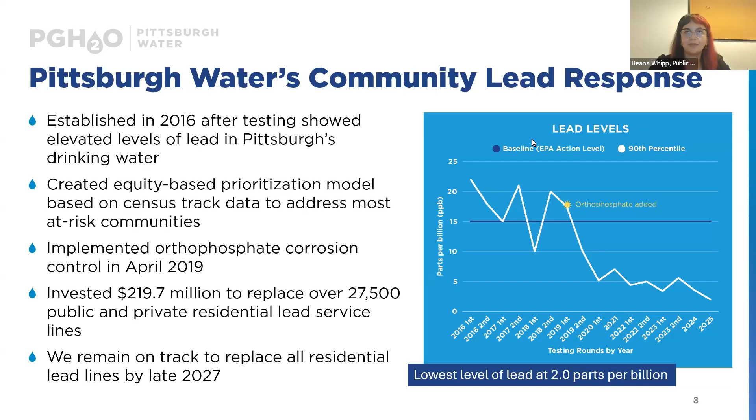So the big question, probably the reason why you're here, is what exactly are we doing? The work taking place in Bloomfield and central Lawrenceville falls under one of our neighborhood lead service line removal projects. For neighborhood LSLR, we'll replace all residential lead service lines to protect our community from the harmful impacts of lead, which includes both the public side and the private side. This is at no direct cost to our customers.

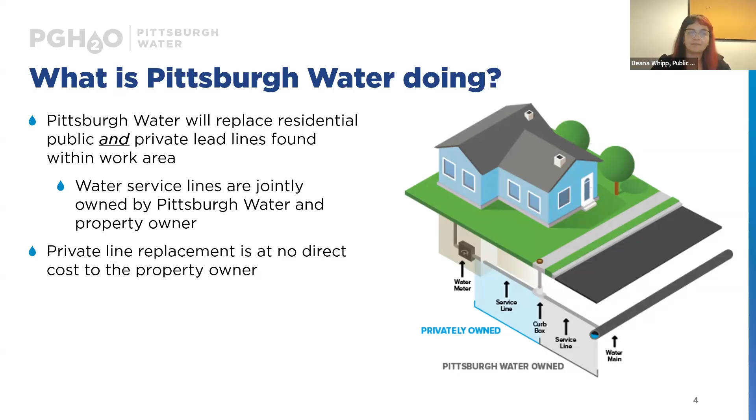The next question folks usually have is how do we select these addresses. When planning our work areas, we follow the PA Department of Environmental Protection's inventory guidance to determine whether a home has a lead service line or if we don't know the material. Building our inventory includes looking at historic installation records, physical inspections of service lines through excavation and examining the pipe material, and even customer reported data if someone had proactively removed their service line and gotten it replaced. So if our records indicate that your pipes are either lead, galvanized iron, or unknown, you are eligible for a replacement. But not every home on the street will require one. Service lines vary from property to property, so neighbors may receive different notifications based on available records for each property's service line material.

For attendees who may not have received an agreement packet, I highly recommend checking out our Lead Service Line map. It's an interactive GIS map hosted on our website. You can go to pgh2o.com/leadmap and plug your address into the search bar. It'll bring you right there and show if we've completed replacements in your area, if it's planned future work, or if we're currently working there. It'll also identify what we have on record as to whether your public and private line, and what material that may be made of.

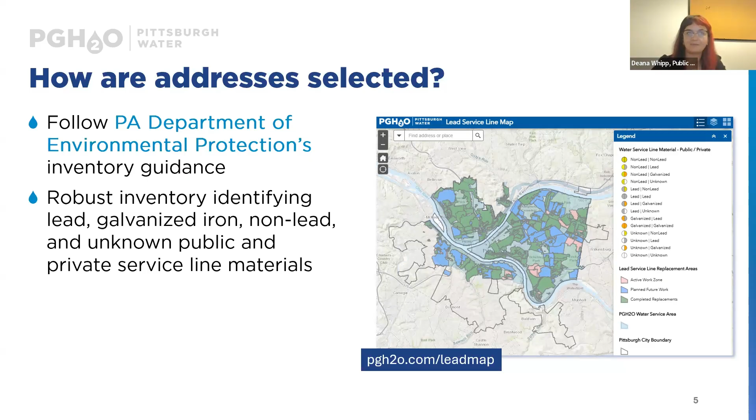So diving into the nitty-gritty, we're going to discuss what residents can expect, from receiving that agreement packet in the mail to having streets milled and paved during restoration.

The first thing you probably received was this wonderful packet in the mail. It does include a wealth of information, but our Lead Help Desk sends out this packet about 45 days in advance to notify addresses identified in the upcoming work area. This is sent to both the property owner, if you live at that address, or the landlord and the tenant. So it's a hefty packet, but it holds a lot of information about what is going to be upcoming in your neighborhood, including a letter from our CEO introducing the program and describing the work that Pittsburgh Water will be completing, and an access agreement form, which is very important.

We'll dive into that next. That must be signed and returned by the property owner. Lastly, some informational materials like a fact sheet outlining the property owner's responsibilities, Pittsburgh Water's responsibilities during construction, infographics identifying service line ownership, a general lead FAQ, and termination risks and what comes with not returning the agreement form, as well as additional resources for tenants.

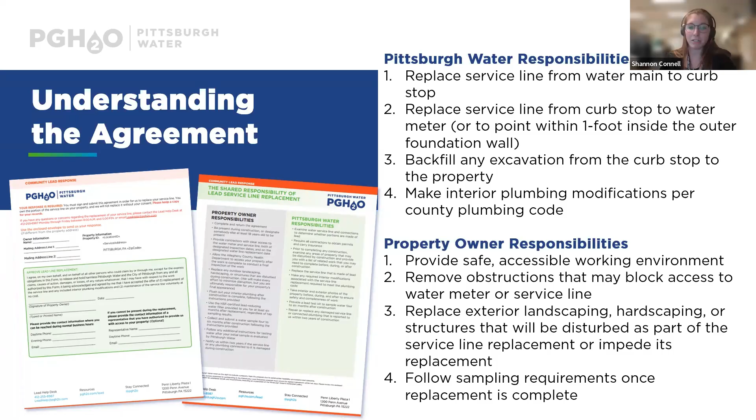This sampling kit typically comes out about three to six months following the replacement of the lead service line. We ask that sampling procedures are followed, as there are a lot of instructions in that kit. Following the replacement, we do ask that you complete sampling to ensure that the lead levels are back to a safe level.

Pittsburgh Water is regulated by the Pennsylvania Public Utility Commission, or the PUC. In 2021, the PUC put out a mandate that we're not able to complete a partial replacement. A partial replacement would occur if we were to do any work on the public side of the service line, such as a repair or replacement.

If there was lead on the private service line, we could not connect back to that private lead line. That would be considered a partial service line replacement, and we're not allowed to do this as ordered by the PUC.

So they mandated that in order for us to avoid a partial service line replacement, we would have to terminate water service on the private side if we do not have agreement by the property owner to complete the work on the public side of the service line, if there is lead present.

Through a series of notifications, which we'll get into on the next slide, we are required to follow this termination procedure in the scenario where a property owner declines or is unresponsive to our outreach attempts and does not sign the agreement. We can't just go up and shut off the water service whenever we feel like it; we have to follow this termination procedure, which includes a series of different communications, such as written communications we send in the mail and postings that we hang at the address.

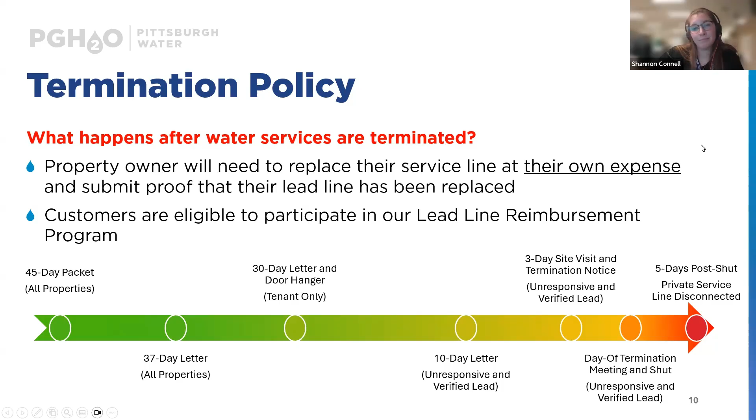So, project initiation - I've mentioned a couple times the coordination agreement or the coordination appointment. Once you've signed that agreement, the next time you'll hear from us is when we call you to schedule the coordination appointment.

So that's one of the reasons we're having this coordination appointment. We've had situations where we've dug up the sidewalk, found copper on both sides of the curb stop, but then gone into the house and found lead.

So we just want to make sure we got all three points of observation and we're not leaving any lead behind. Also at this appointment, the contractor is going to look at your property - your individual specific site. Every house in Pittsburgh is so different. We want to look at your specific house and understand what's going on as it relates to replacing the service line. So, do you have a finished basement? Is there a wall or obstruction over the meter where the service line enters the house? In situations like that, we're going to ask you to give us access so we can get to that meter and service line to do the work necessary to complete the job.

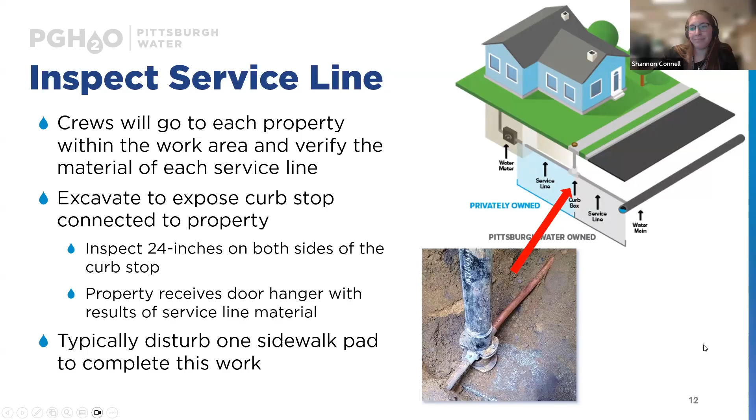If we do need to replace lead on the private side of the service line, we have to get a permit with the Allegheny County Health Department and their plumbing division to do that work. It requires a licensed plumber. ACHD requires us to evaluate the plumbing inside the house, and the biggest part we're looking for during this evaluation is whether there's a backflow preventer present on the property.

The backflow preventer prevents household water from flowing back into the public water system. So if you have some type of cross connection to a part of your sewer system, it just keeps water from going back into our public water system.

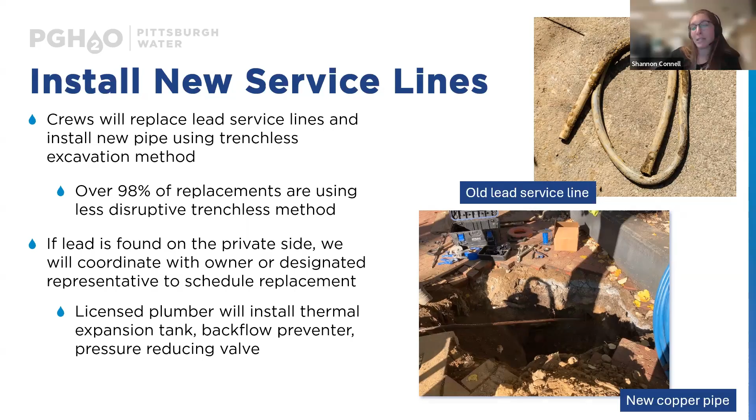To the best of our ability and our contractor's ability, we try to move down the street, do all the work, and then follow up with restoration. This contract—we'll get into schedule a bit later—but we're looking to start work in September. We're going to try to do as much restoration as we can prior to DOMI's winter moratorium going into place, which is November 1st. They don't let us complete final restoration when temperatures drop too much, so I'd say the majority of restoration for this contract will be completed in the springtime.

We will still complete service line verifications and replacements during the winter months. So to the degree that we can get the streets done this fall before the moratorium goes into place, we will be looking to start restoration. We can't pave a street until all the work is done on that street.

Sometimes our best public outreach is our neighbors. If you have any neighbors you're talking to during our project, ask them if they got their agreement in and had the coordination scheduled for the replacement. As soon as we can do that, we can get all the restoration done.

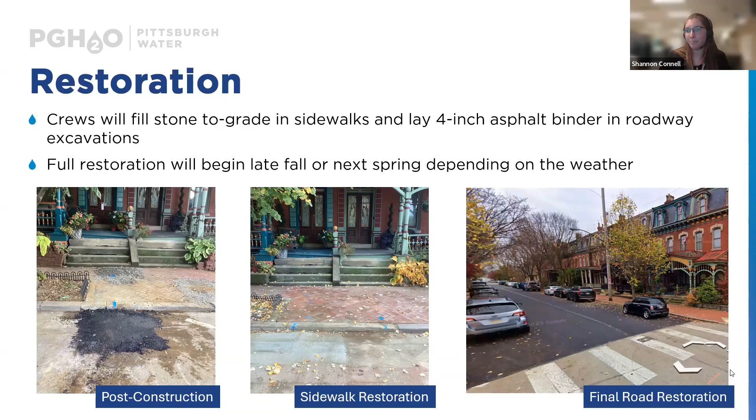Private property restoration is not in the nature of our program. It's not how EPA or PENNVEST, where we get our funding from for these projects, allows us to spend our dollars. They give us funding to use for specific purposes, which is to replace the lead service lines, and they limit us to where we can use it, such as private property. So as part of this program, we do not cover private restoration.

Inside the house, like I mentioned before, we need access to the water meter and the service line. So if drywall needs to come down, for example, if drywall is blocking the meter and the service line, we would ask that you would do that and then put that back if you wish.

Outside of the house, if the area between the curb box and the foundation is disturbed, our contractor is going to backfill and level that area, but the property owner is responsible for the restoration. I do want to point out that our contractor does everything in their ability not to disturb private property.

Over 98% of our locations that we work at, the service line replacements are done using trenchless technology. So we do intend on minimizing the impact as much as possible, but everything doesn't always go according to plan during construction. So it's really important that you're scheduling these meetings so we can discuss the replacement methods with you. The contractor can discuss in advance what they think they need to achieve, how they need to achieve that replacement given site constraints, and what would and would not be restored if disturbed.

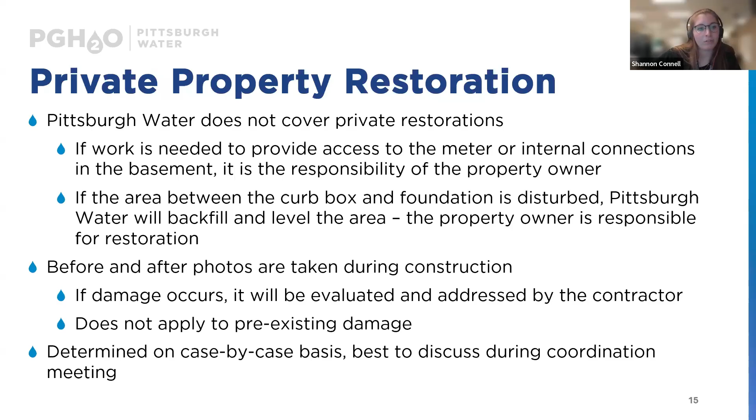So, like I said, our contractor does plan on starting this work September 2026. Each of those phases that I showed you, there's 6 for the entire work order or for the entire project area. At this point in time, each phase is expected to take about 2 months.

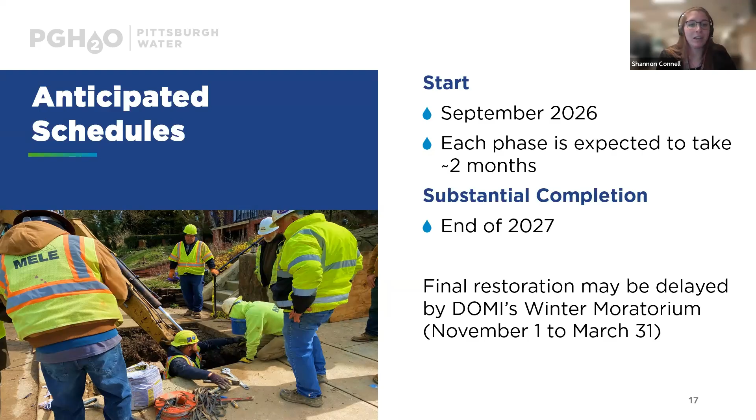Again, like I said, DOMI's winter moratorium does occur. It begins November 1st and ends March 31st, so final restoration could be delayed by that. They don't let us complete final restoration when the temperatures are too low. That being said, if we do have a mild winter, maybe some warmer weather conditions, the DOMI inspector for a given area will monitor that and allow us to complete restoration. Again, very, very temperature dependent though.

So our daily impacts, our typical permit hours through the city of Pittsburgh are Monday through Friday from 7 a.m. to 5 p.m. Sometimes on busier streets, DOMI does limit our work hours, it could be from 9 a.m. to 3 p.m. instead. These will be on the no parking signs. The dates on the no parking signs are the dates that match our permit. Sometimes it's longer than the actual amount of time it will take us to complete that work, but these are permits that we get through DOMI, so the work hours and the dates will be on those no parking signs.

Crews will close streets where the service lines are being verified or replaced as needed. That being said, they do accommodate local traffic. I know sometimes if you're driving down a street and you see a road closed sign, your instinct is to not drive down that street. But if this is where you live and contractors aren't directly in front of your house, feel free to flag someone down and let them know the situation, let them know where you need to get. They're as accommodating as they can be, while also ensuring that the site is kept safe. They don't want anybody going into one of the excavations. So even if you're on a street that is closed, just flag down one of our flaggers or the contractors and let them know where you need to go. They can accommodate you getting in and out of the streets in the neighborhood.

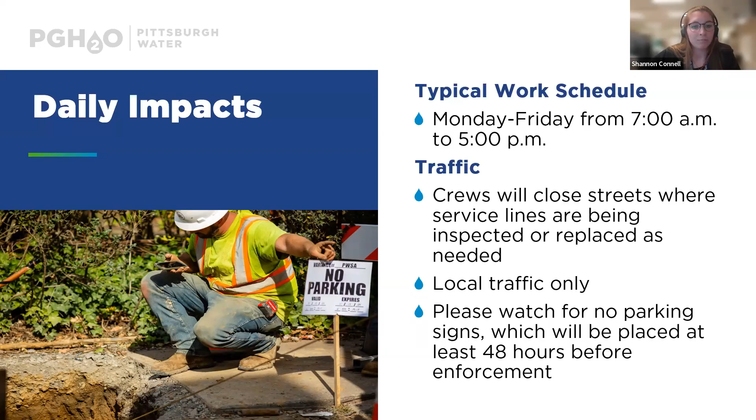So some final construction considerations that I have for you. During the replacement, the homeowner or the homeowner's designated representative must be present. We don't want to replace the private lead service line if you're not home.

Any areas that we disturb, we backfill as part of that service line work. Sometimes our curb boxes might be in a yard, and we do have the right to access our infrastructure as it is public property. Depending on the location of the curb box, this can raise some questions with homeowners, but we do need to be able to access it to verify the service line materials.

Stairs, retaining walls, and certain decorative landscaping like bushes or flowers could be disrupted during that work. So I really just want to emphasize that these impacts should be discussed during the coordination meeting, so we can try to address them before any work occurs, before any digging occurs, so we can get ahead of these things before they happen.

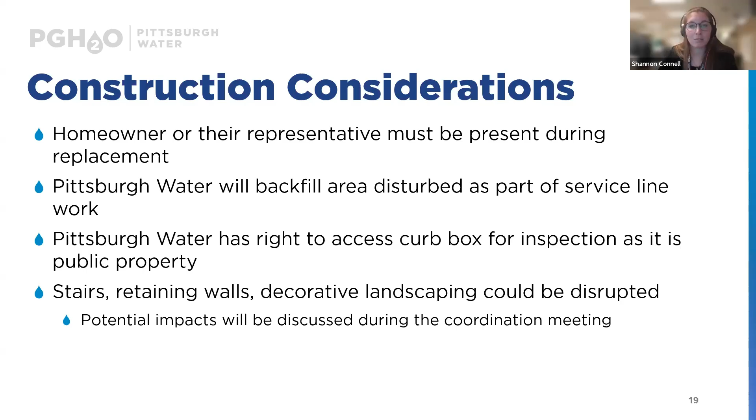So I will kick this one back to Deanna. Thank you, Shannon. Yeah, just want to include some additional project resources for everyone.

Our website's a great place to start. Just going to pgh2o.com/lead, you can see our community lead response page right there. As well as other construction updates, you can go to pgh2o.com/construction. It'll show where lead service line replacement projects are taking place, as well as other Pittsburgh Water related construction, like sewers or small diameter water main replacements.

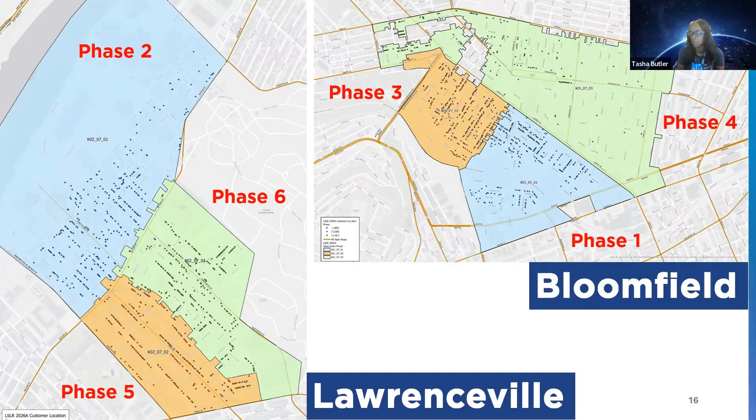We've got the address, Simona Ave, so we can look into that. It is other work, just FYI, Dan. I do know they've been checking some curb boxes and things of that nature, so I think ops has been up through Stanton Heights a few times. So those could possibly be because of that, just FYI.

If you ever have a question about the lead work, please give our Lead Help number a call. The folks that work on our Lead Help desk — if it's not a lead project, they may not have the answers for you, but if it's associated with our lead project, they'll be able to help you out.

I also see the issue of the shut-off notice. As Shannon explained, we do send the 37-day shut-off notice to all locations, regardless of whether you sent an agreement in or not. What we found is — I'll go through it real quick — we have people who send in an agreement and then are completely unresponsive. If we haven't sent that 37-day notice and that person remains unresponsive, we have to start that process.

Often when the contractor is trying to pave the street, we don't want to pave it if we still have to dig more holes. So we do send those 37-day notices to everyone. It says right on the top: if you've already returned your agreement, please ignore this notice.